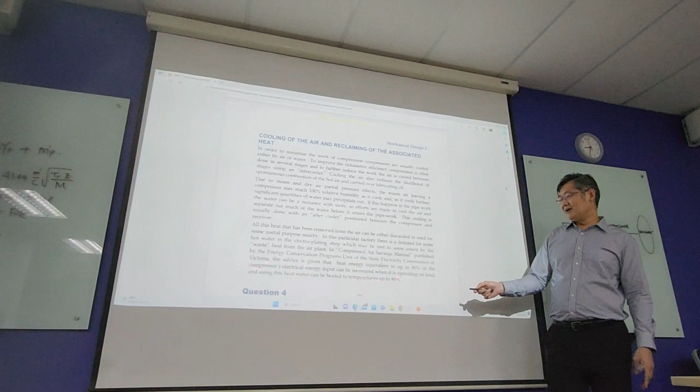According to the Australian standard, Victoria State, you are able to salvage 80% of the power - that energy you supply to the compressor. You are able to use 80% of it to heat up water to 80 degrees Celsius. This is what the state of Victoria allows the factory to do.

So now come to our question here, question 4. Partner 1 and 2 do it jointly, worth 2 marks. From the sample table of aftercooler provided, which I think we have seen - so which one did we select last week?

The aftercooler, remember? HD16. HD16, right? Okay, very good. HD.

Given here, for this aftercooler, if water enters at 15 degrees Celsius, at what temperature will the air leave it? Alright, this is part A.

Part B: assuming the large electric motor driving the compressor is 93% efficient, determine approximately what percentage of the electroplating hot water demand can be met by heat scavenging. Alright, so what does that mean?

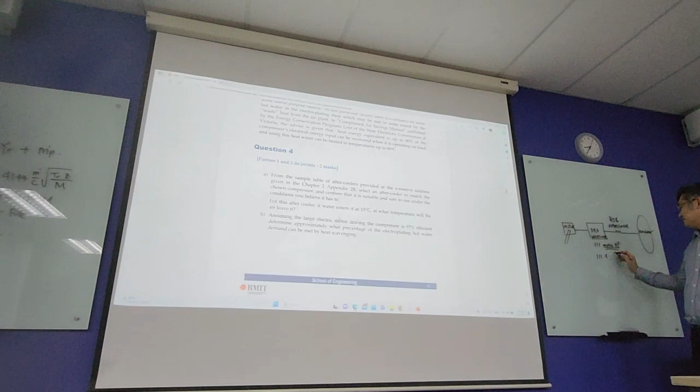Because later on we want to find out the electrical power supplied to this compressor, we want to find it in kilowatts. How do you convert horsepower to kilowatt? Metric, and we call this metric horsepower. So 111 times 1 over 1.36.

This one you Google, you know - horsepower to kilowatt, use Google conversion, you get it. So what's the value? Horsepower converted to kilowatt, from the table, from your DR4 table, DR4 your compressor.

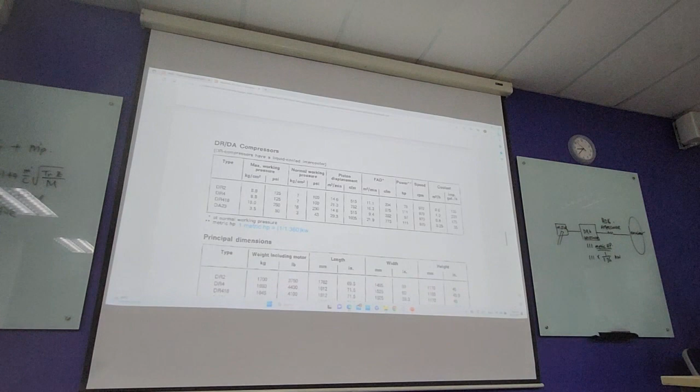Yes, when I Google, I got 1.34. Is it power divided by 1.34? What value did you get, do you have this? I don't know, we Google, you got 1.36, mine is 1.34.

Oh okay, so one is British horsepower, one is metric horsepower. In Australia they use metric. So this is metric, another is British unit. So different value, but close. Different, but still different value. The unit they use, so we stick to metric.

Okay, so in this case, this one is 81.6 kilowatt, right.

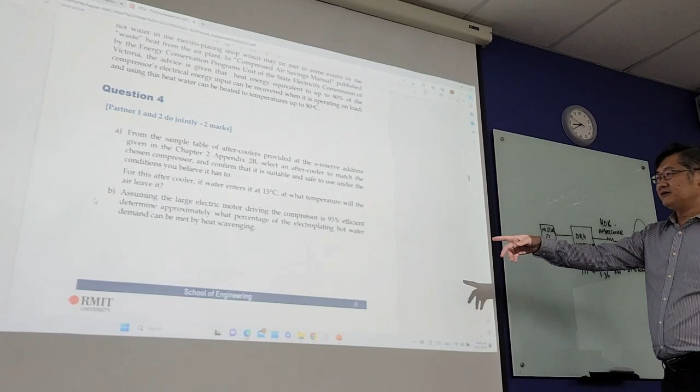So what happened is our question asks, right? Okay so here assume, electric motor driving compressor is 93% efficient. That means this is 93% efficient, right? So for the electrical power supply to the motor, and the motor has this efficiency of 93%, what will be the original power supply to this compressor? Greater or lower? Greater, right. Okay so what will be the value for this kilowatt used?

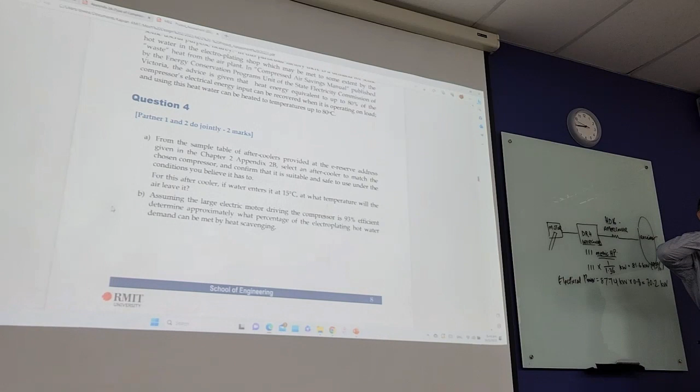Alright, so for your part, according to the table, after you calculate, how many times does the compressor go on and off? When compressor is on, means what? Means you are able to generate heat. Compressor off, there may be no heat generated. So you have to find out the cycle, and then multiply to get what will be the heat generated by the compressor. Then you know the exact figure of what the heat generated will be, depending on how long your compressor is actually on.

So later on when you go back, you calculate out the compressor on time. Then you will have this roughly this figure, plus minus, very close, supposed to be, because according to your list, your compressor is always on, probably a few cycles off. Most of the time it will be on, so quite close to this, quite close. Alright.

So next thing will be how much heat can we draw from the intercooler and aftercooler?

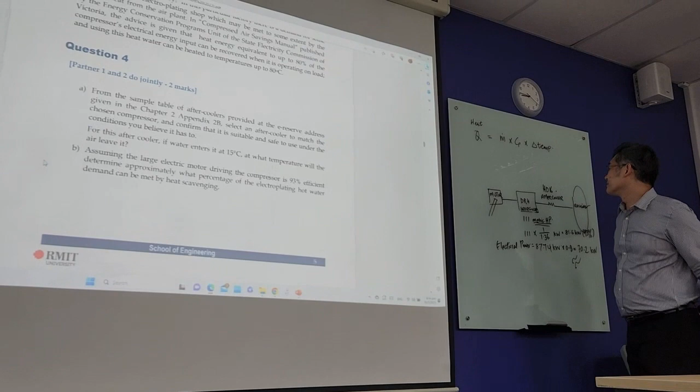Okay, so we talk about mass flow rate, right? This mass flow rate, where can you get the mass flow rate? Where can we get this mass flow rate? Cp specific heat, this one is specific heat, and then this is the temperature range or temperature change.

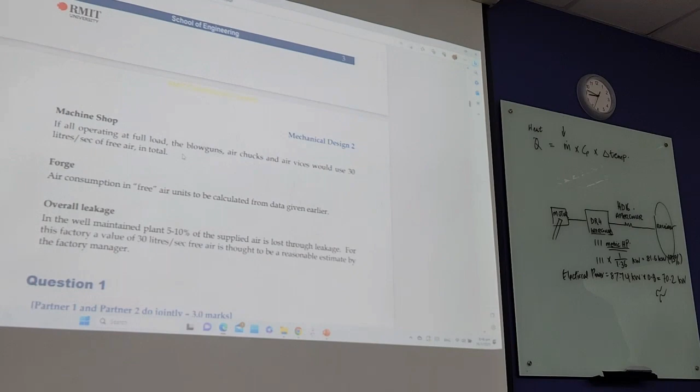Alright, so from our, remember initially our workshop, electroplating workshop, they mentioned about the temperature, right? If I'm not mistaken. Okay, over here, right, electroplating workshop.

Alright, so what would be 15 to 60? What would be the temperature change? 45, right? Right, 45. So in this case, what it means is a change of 45 degrees Celsius. How much heat do we need to heat up from 15 degrees Celsius to 60 degrees Celsius? How much heat needed?

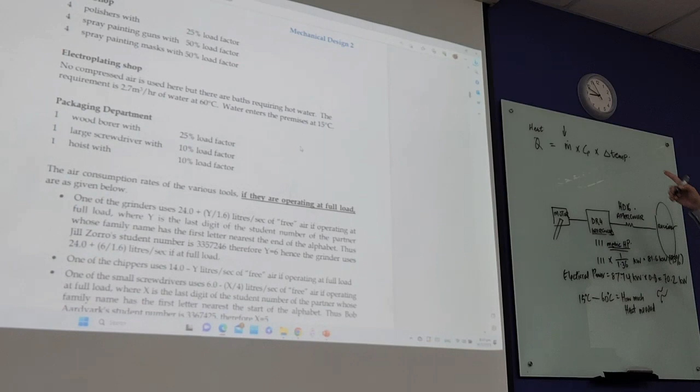So we apply this formula, heat needed, so this one with 45, right, specific heat. If you Google, you know water's specific heat, right?

Okay, now we come to this mass flow, right, where to get the mass flow, right? But this one is for the volume flow rate. Okay, it's density, oh yeah, density. They convert it as heat transfer, I forget already. Density.

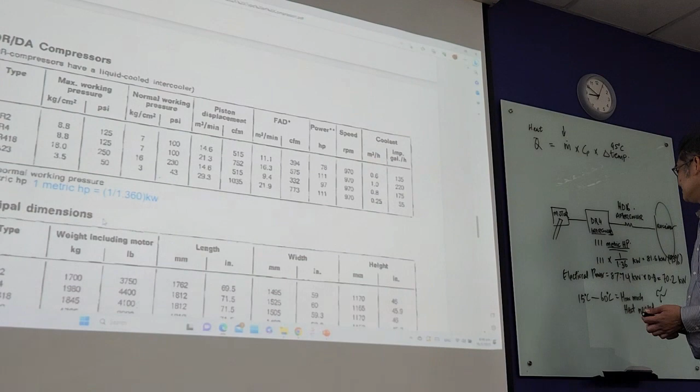Okay, now we take a look at this, our compressor DR4, cooler. Alright, so this is the volume flow rate, right? Correct? Alright, so for the compressor we have 1 meter cube per hour.

Okay, how about after cooler? Remember after cooler? HD16, alright, DR4. Okay, so over here you can see after cooler we use for DR4, water consumption 1.7, very good, so after cooler is 1.7. End up will be 2.7, right, 2.7 per hour.

So this is mass flow, right? This is the volume flow, so to convert the volume flow for water, right?

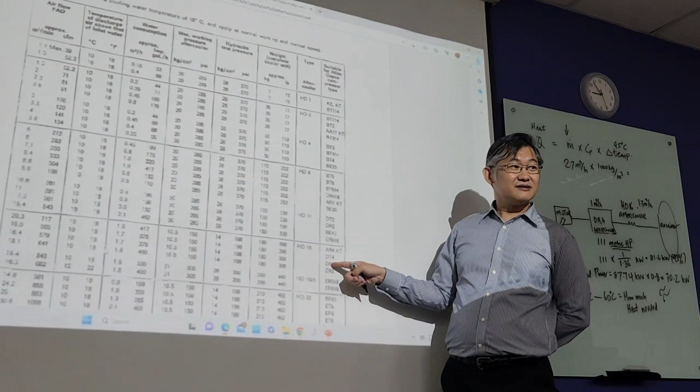Alright, so volume density of water, you know, right? Density of water 1000 kilograms per meter cube. Alright, so we want to calculate kilogram per second, right? So from hour we want to get second, right?

Okay, so what will be the mass flow, 0.75, right? Kilo per second, right?

So what is the heat needed? So now we can calculate the total heat needed to warm up the water to 60 degrees Celsius, right? So you just plug in because this is mass flow rate. Your specific heat of water, you know, alright? Times your 45.

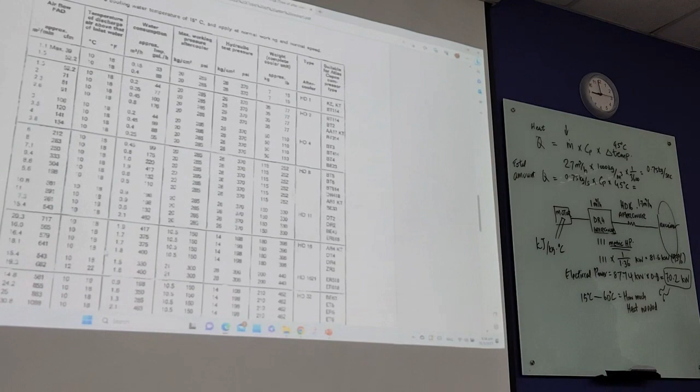So the report, okay, now we come to how you write the report, right? So imagine you are the engineer, engaged by the client, engaged by the customer. So how you write the report in order to impress, or not so to impress, but to show the customer or the client that you actually do your homework. You actually do the calculation to prove why you have to install this and that, right?

So you have to write in the way, like a report form. So question 1, new page, question 2, new page. So that as a client, I can see and read easily. Because previous school, what they do is they cut and paste the Australian standard. Then everything Australian standard. As a client, I do not need to refer to Australian standard, right?

You just need to quote, okay, in accordance with this clause, alright, this Australian standard, after that the report calculation. Don't go and copy all the statement. Alright, mean nothing to the client, mean nothing to customer. I waste my time reading all this.

But I want to know the source, where how you quote it, right? You have to quote the source. Alright, clause don't know what, according to Australian standard. Then after that, all this requirement needed from the question.

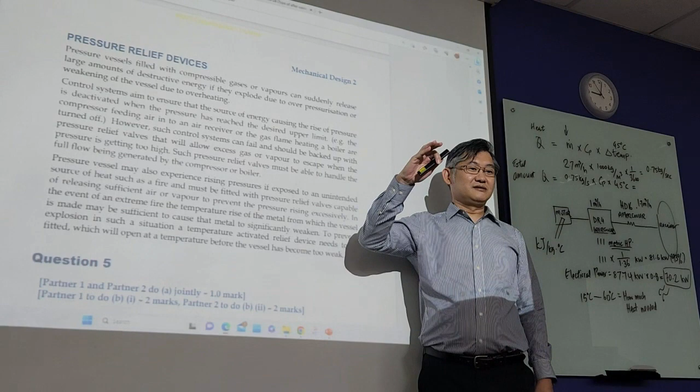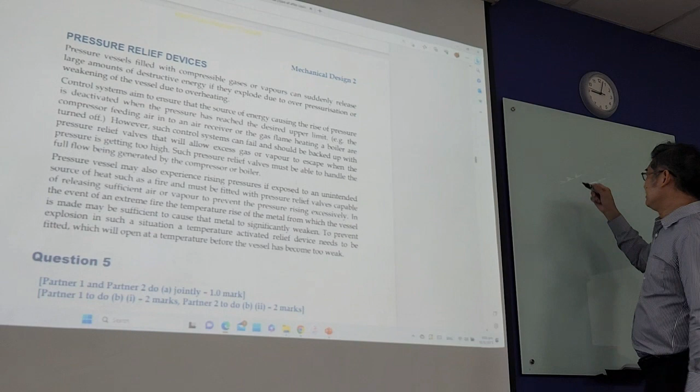So remember what is the value we discussed just now? Our compressor must stop at 790 kPa, right? Remember, compressor off at 790 kPa.

Your maximum working pressure for the DR4, where's the 862? Very good, 862.5 kilopascal. So we will take, for simplicity, this maximum working pressure as our set pressure, also equal to set pressure.

So what does that mean is, if let's say our compressor failed to stop, it will keep pumping air. In this case, the receiver becomes pressurized further. So our safety device at 862.5 kilopascal has to release air, or the valve has to be opened.

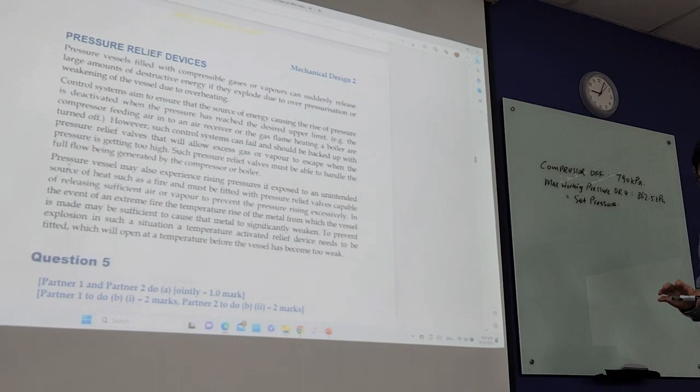Alright, so we have discussed this just now. However, such control system can fail and should be backed up with a pressure relief valve that allows excess gas to escape when pressure is high. Such pressure relief valve must be able to handle the full flow generated by compressor. The vessel may also experience rising pressure if exposed to an unintended source of heat.

Alright, so this is scenario 2 we discussed just now. Sources such as fire must be fitted with a pressure relief valve capable of releasing sufficient air or vapor to prevent pressure rising excessively. In the event of extreme fire, temperature rise of the metal from which the vessel is made may be sufficient to significantly weaken the metal. To prevent explosion in such a situation, a temperature activated relief device needs to be fitted.

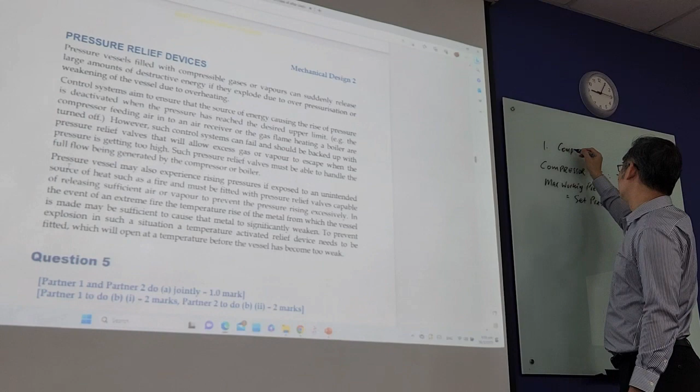Alright, so this is the first scenario: compressor fail. Second scenario: near fire. So what will be the 110% of 862? Our safety valve, what's the value?

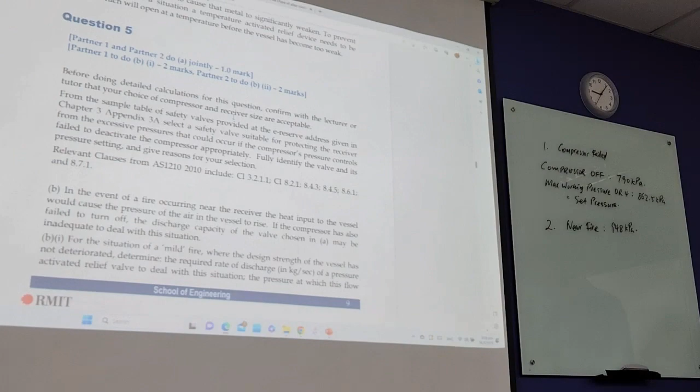Alright, okay, now we come to question 5. Just an overview, they actually give you some overview of what to do. Before doing detail, okay, partner 1 and partner 2 do part A together, jointly. I think they put the A missing, so this is part A.

Part A bracket missing. Alright, so before doing detailed calculation for this question, confirm with the lecturer or tutor that your choice of compressor and receiver size are acceptable. That's why I want to repeat this: if your compressor and receiver size deviates too much, I can't help you because it'll all be haywire. That means you calculated wrongly, right? From the sample table of a safety valve.

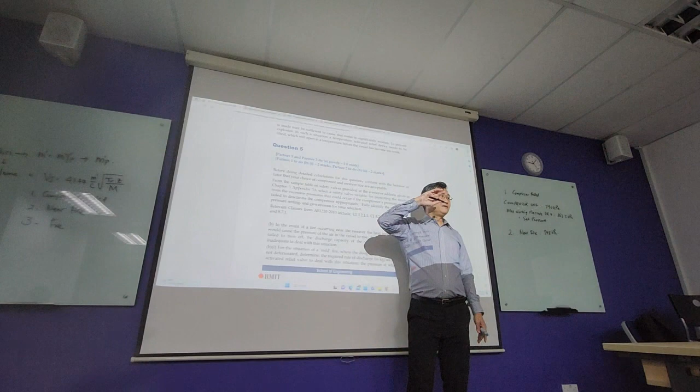Provided at the e-reserve address given. So if you have time, go check. Can you access the activity again? Cannot? Last week I believe most of it couldn't, but this week can. Canvas activity, still cannot? Then I will post it up. If let's say it cannot, then I will post appendix 3A today.

Suitable for protecting the receiver from excessive pressure that could occur if the compressor pressure control fails to deactivate the compressor appropriately. To identify the valve and its pressure setting, give reasons for your selection.

Alright, so please refer to Australian standard. Can you see the Australian standard as well? Has anyone already downloaded Australian Standard 1210? No, nobody downloaded it. Then I will post it again tonight.

So this is A, alright, this is A. Partner 1 and partner 2 do this jointly, right? Partner 1 to do B section 1, partner 2 do B section 2. So you will see, that is 2.

Over here, in the event of fire occurring near the receiver, the heat input to the vessel causes the pressure of air to rise. If the compressor has failed to turn off, the discharge capacity of the valve chosen in A may be inadequate to deal with this situation. Why? Because of fire nearby. Alright, our set pressure is 862, but now, near the fire, it will rise up to 948.

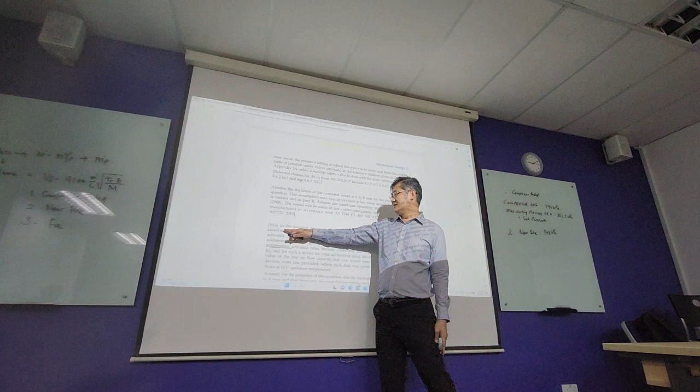So this one is meant for scenario B, so partner 2 has to do this. Subsection 2: in the situation where fire has caused the temperature of the vessel to rise sufficiently to cause the strength of the metal to be weakened - just now I showed the chart, right? You have to plot the chart and then find out the relieving temperature, TR, from the chart to do this question.

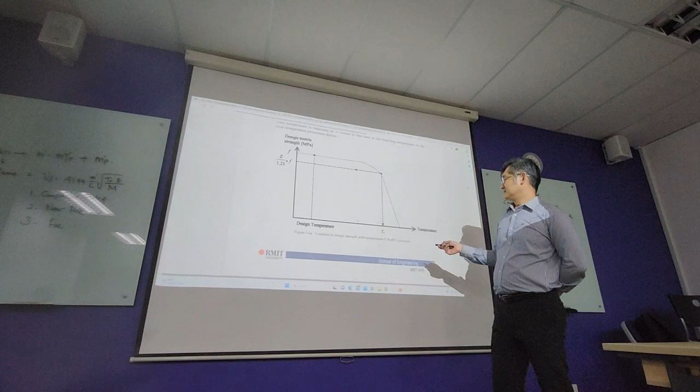Okay, so I go back in order for you to see. Question 6, the last question - what is the last one? Question 6, last one. I got it, this is the chart for those partners who need to do this question. This is how you use this to retrieve or get your relieving temperature.

We finished like one week early, then got the next assignment. But we got one week break. Tuesday. Oh, yeah.

Next week, alright, so this is how you get your relieving temperature. In order to use this formula, because this formula requires you to use this TR value. For partner 2, I hope you take note of this, so when you go back, you are able to proceed with your questions.

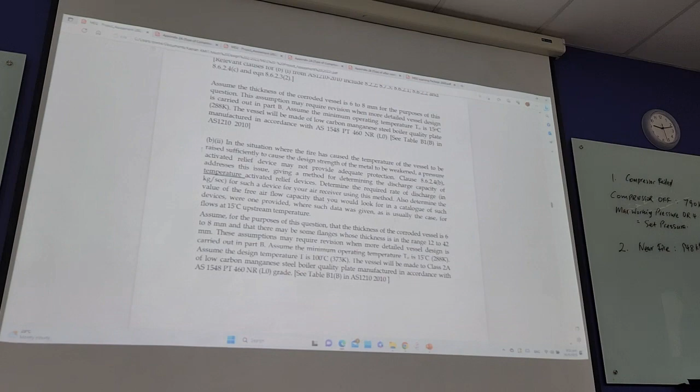Okay, so I have some exercises for you to familiarize yourself with these questions, let me find it. Better not as homework, I don't know.

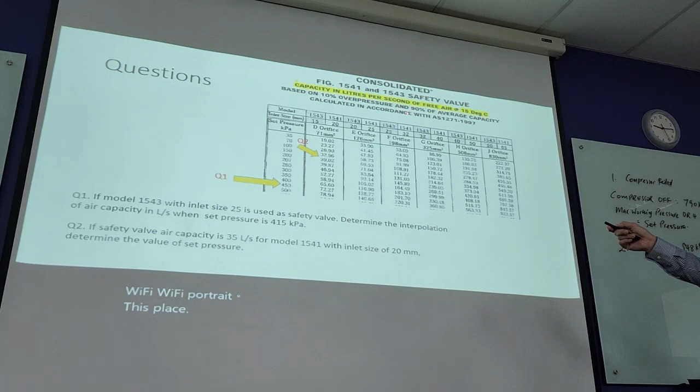Okay, so when you go back, this is the safety device, right, that you will use. You can see over here, 1541, 1543 safety valve - so 1543, 1541 model. Based on 10% overpressure and 90% of average capacity, calculated in accordance with Australian standard. Capacity in liter per second.

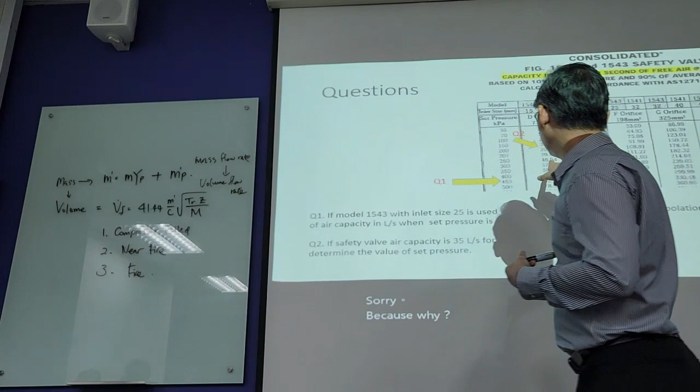If you ask why, later on we have to change to liter per second, because this value here is in liter per second. Because we talk about mass - remember just now we talked about all these, in mass flow rate, mass flow rate - we want to convert to volume flow rate. Because of the safety device, we use liter per second, which is a volume flow rate. So we have to apply this formula.

Okay, so over here you can see, if you read your question right, they talk about the orifice, the orifice surface area - this must be more than 10 mm. So this is a surface area, you have to find the diameter, right? The specified diameter is more than 10 mm. So you have to find the proper orifice to use, depending on your set pressure. Remember what is our set pressure?

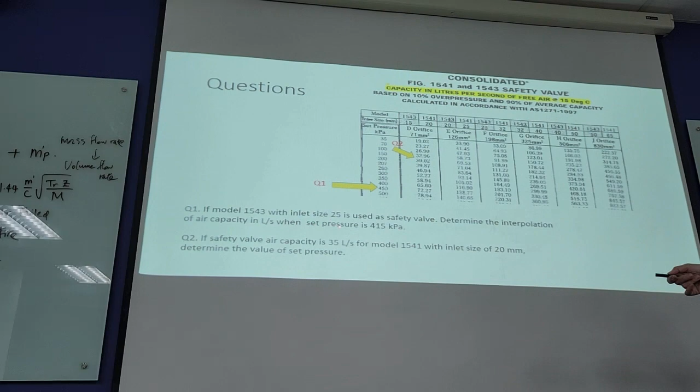Alright, but this exercise is just to familiarize. Okay, we do question 1 and question 2. In model 1543 with inlet size 25 - this one 1543, yeah, this one is used as a safety valve. Determine by interpolation the air capacity in liter per second when set pressure is 415, so in between here, right, because later on you have to do interpolation, because nobody will get the exact value, you might have values in between.

So how do you do interpolation? Okay, so now this is 1543, right, so we are referring to this part. So we spend 5 minutes to do this, at least you get the idea of how to get interpolation for this safety device in liters per second.

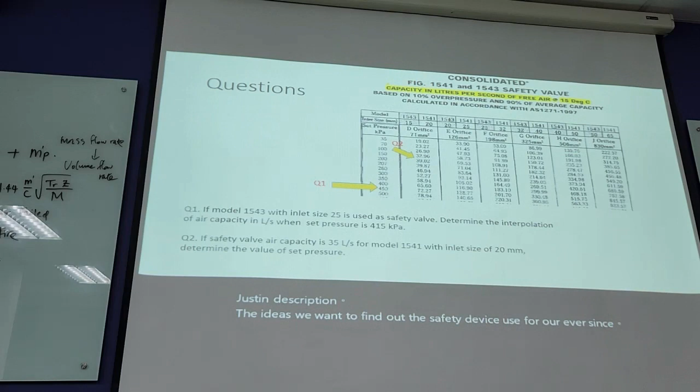Anyone have difficulty digesting this question? The idea is we want to find out the safety device used for our air vessel. Our set pressure is already determined because from our compressor, 110% of set pressure is this value, right? But in order to go back and use this to find the safety device, we do this exercise. When you go back, apply the same approach, then you will get the correct value for your answer. So now let's try to exercise a bit. You know what to do when you go back.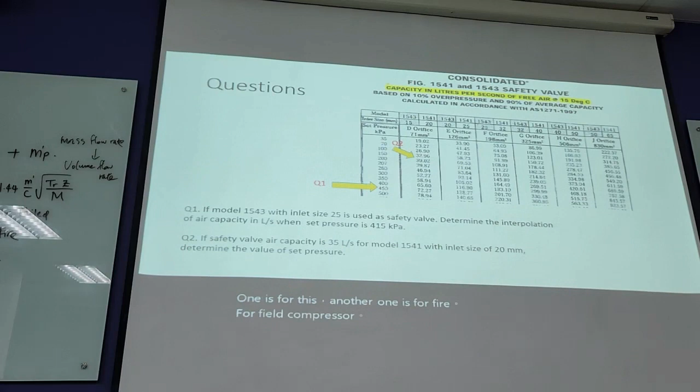So the safety valve will be at the receiver, is it? Yes. So the one that we are reading there is what's coming to the receiver, basically. Yes, receiver, correct. We're talking about receiver, compressor, right? Imagine now your compressor fails and keeps pumping air. So you must have a safety device here. One is for this, another one is for fire. This is for fuel compressor. So it depends on your design. Another one is for near fire. And then the partner two will have fire.

But to find out this, you have to know how to use this table. Alright, so let us spend some time, then go back, you can sleep better. This is about 120.

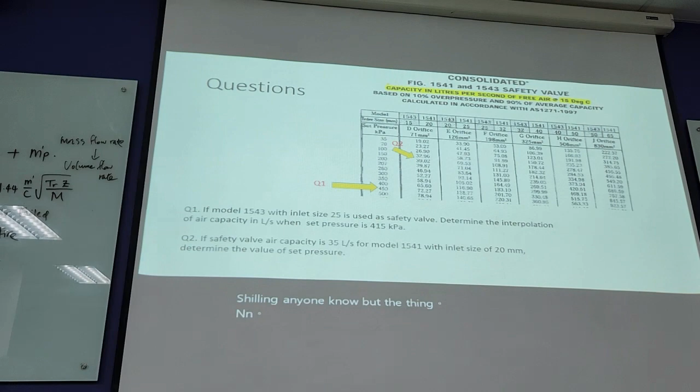Mr. Ashraf is not here, no? Because I don't see him logged in. Mr. Pradeswaran also not here. Mr. Takashini, anyone know Takashini? Edmund Ng. Okay, I know you, this one, right? Muhammad, so it's one Amiru, copy, but Amiru do it. But he says it's size 25, so it's this one. No, this one is. Anyone know the name I mentioned just now, your classmate, your friend? Can you inform them or update me where are they about?

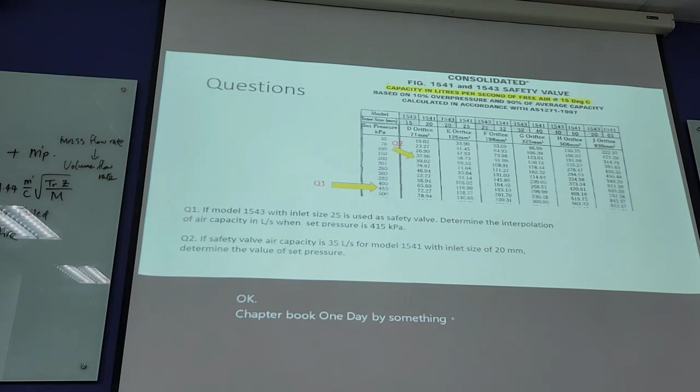You take the set value. So for those who have an issue for this case, we want to find the pressure, so why is it interpolation, why is it not the pressure but the air capacity? So y1 is the first value, air capacity, which is 183.1. Then x is the pressure, so x is your set pressure, that means 415. Alright, so this is how you carry out one point of interpolation. Similarly, for your question, also do the same.

What's so different?

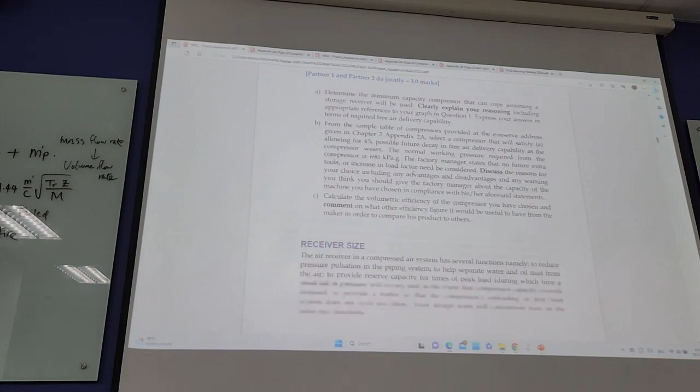So fast, Monday, again, no Monday class. Fast right? What the heck. We just study after that, just like few days only. What the heck, that's 78, oh that's a big impact.

Okay, the 10 mm is actually specified in the Australian Standard 1210. If you look carefully, it actually mentioned it must be more than 10 mm, to prevent sticking, because if the area is too small it might be subject to contamination or corrosion.

Let me check whether subsequently... oh, they haven't checked yet. I forgot, suddenly my brain cannot work. Oh, maybe it's this one.

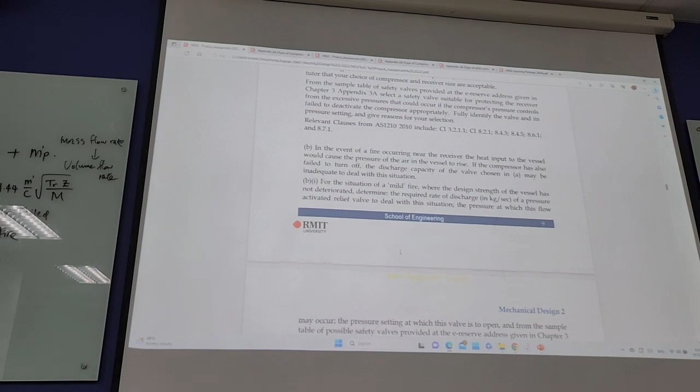Go back and see the video and try again. The paragraph didn't mention 10 mm, but if you go to Australian Standard 1210, they actually specify more than 10 mm. Good question, 10 mm, it's actually derived from the Australian Standard - the diameter.

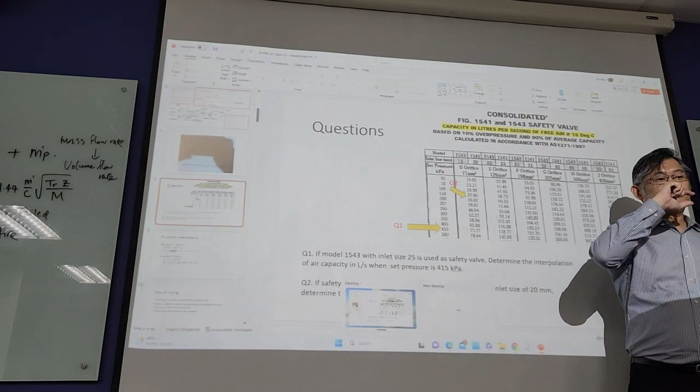Okay, so now the thing is, if you cannot find - let's say after you select the safety device and the diameter is smaller than 10 mm, what can you do? You have to change to another safety device to meet the requirement, because Australian Standards say more than 10 mm, we have to conform. Then you have to suggest an alternate safety device able to discharge the overpressure while also meeting the bore diameter. Alright, so this is what we do.

Any issue with question 2 or not? Question 2 is the other way around - you find the set pressure. Given the flow rate, you are able to find the set pressure. Vice versa.

Okay, any question related to interpolation and finding out safety devices? Alright, if no question, let us go through. As you know, today we are supposed to cover all of Project A, Project A questions for week 2.

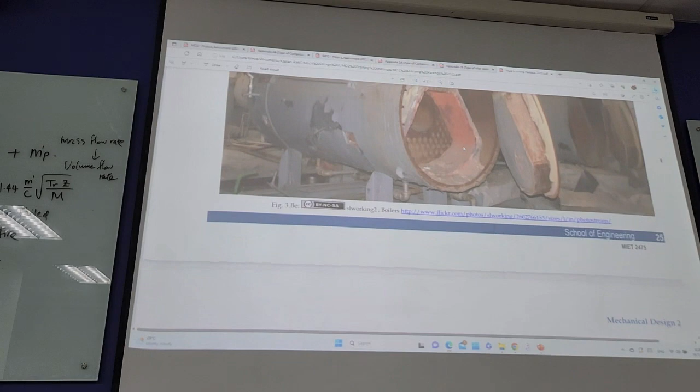And the last one will be piping. See the position from here - that's not the one. If you have time, go through all these slides yourself.

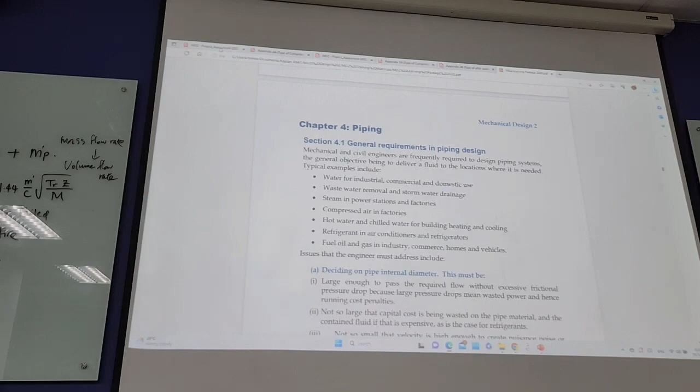Alright, so piping - for us we also have to design piping according to our requirements here. Let us take a look at the requirement. You can see from here, distribution of air to tools - after our receiver, this output goes to the various workshops. Altogether we have 6 workshops.

If you look carefully, how many workshops do we have? We have fettling shop, machine shop, assembly shop, paint shop, electroplating shop, and packaging department - 6 workshops, right, 6 workshops.

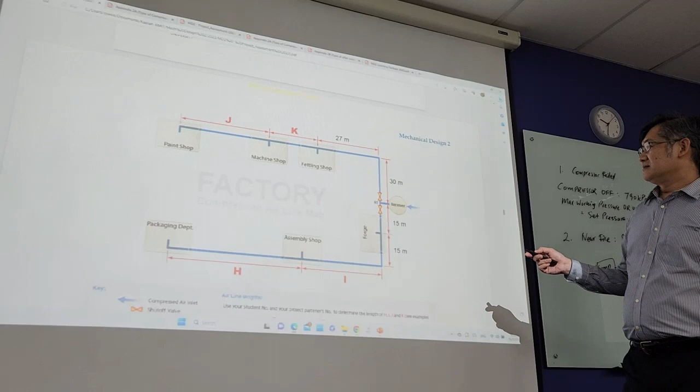Over here they show us the requirement - this is just for overview. When you design, you have to install fittings, and then also at 30 meters there's a drain line to drain the water out. This is just a guideline showing us how you run your piping. Alright, so this is our air receiver.

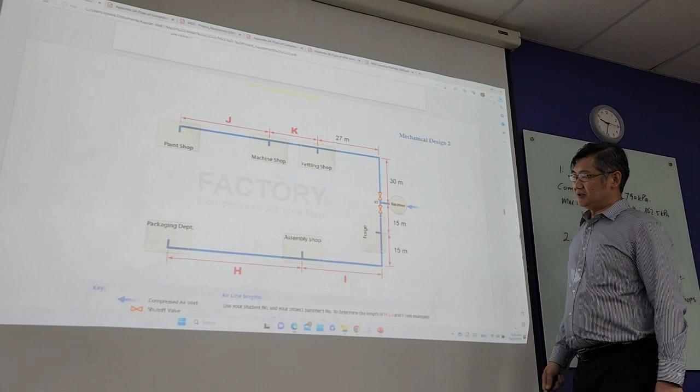Shutoff valve, then on my right we have fettling shop, machine shop, paint shop; on my left I have forge, assembly shop, and packaging department. Following the distance drafted here, you have to calculate pressure drop towards the end. Also, you have to meet the required velocity, which must be more than 6 meters per second.

Alright, later we'll take a look at the question, but this gives you some idea - you need to actually draft this on the report. And this is JKIH, so depending on the partner, later you will see the question asked depending on your student number.

So over here they show some of the distances. Alright, using your student number and your project partner number to determine the length of HIJK. So given this, depending on your student number, everyone will be different.

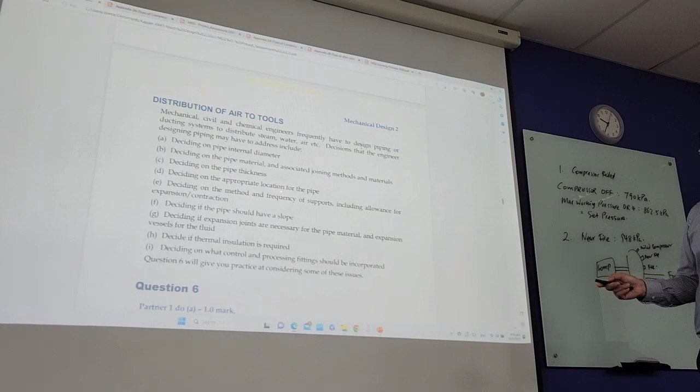Okay, so let us take a look at the requirement here. The decisions an engineer designing piping may have to address: the internal diameter of pipe, deciding pipe material, associated joining methods and materials, deciding thickness, deciding location, deciding method and frequency of support, allowance for expansion, deciding if the pipe should have a slope for drainage of water, deciding if expansion joints are necessary for the pipe material, and deciding if thermal insulation is required.

This is especially important in Australia, where they have winter and ice forms - just like for us, we have a student from Moscow, and he shared what the temperature is like in Moscow during winter.

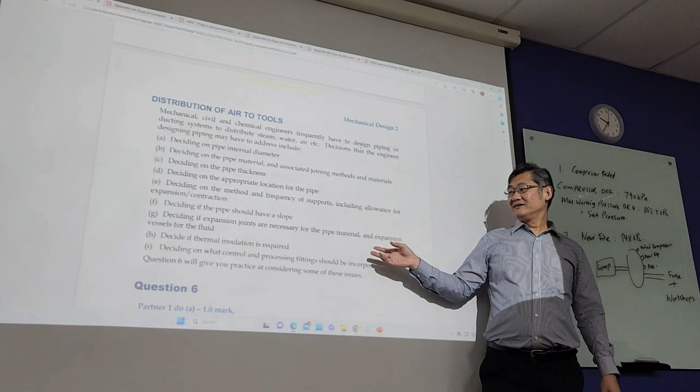Minus 41 degrees Celsius. I don't know how he survived, minus 41. So what happens is, even aircraft on the ground, you have the on-heater, because at minus 41 it becomes ice. As you know, if the pipe or vessel becomes ice, what happens? It ruptures, expands and ruptures.

So even aircraft on ground, they turn on the heater just to prevent ice from forming at minus 41. In Singapore we don't have these issues, but in Australia and Russia they have to properly insulate the piping. For aircraft it's the same thing, all the piping is insulated with this heating element.

In the air, what is the temperature roughly, at cruising speed? At 36,000 feet, let's say you go on holiday, up in the air at 36,000 feet, it's minus 56 degrees Celsius. So without heating, everything becomes ice.

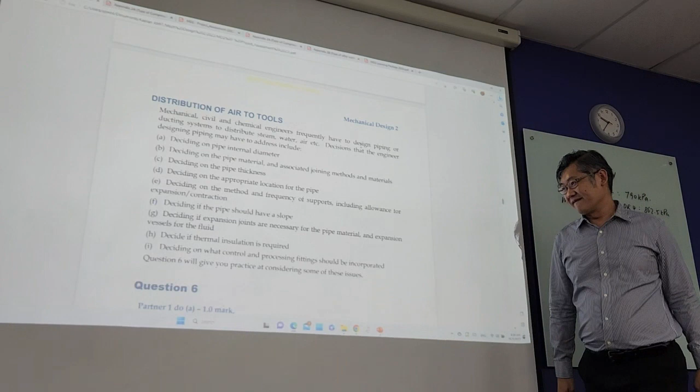Alright, so decide if thermal insulation is required, and decide what control and processing fittings should be incorporated. Our course notes have explained the fittings, so please take a look and decide what fittings you need to install.

So over here you can see the distribution. Partner 1 does A, 1 mark, Partner 2 does B, 1 mark. X and Y are defined, okay. If X plus Y is an odd number, then partner 1 and partner 2 do part C together. If X plus Y is an even number, then you do part D together. This is so that it prevents you from copying.

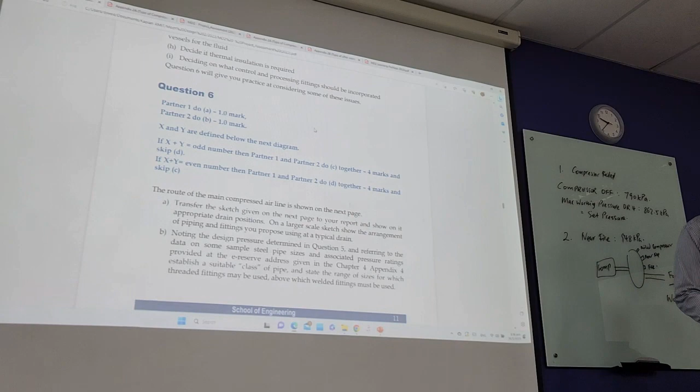Okay, so the route of the main compressed air line is shown on the next page, what we have just seen now.

Now we want to take a look at this requirement. The objective in questions C and D below is to determine appropriate internal diameters of various sections of the main pipe. So what happens is this, you must understand.

The pipe size is different. Here, higher velocity, right, slowly going toward the end, smaller the pipe, because the demand is reduced. Over here, the demand is more because you must cater at this section, from the receiver, you must cater for the downstream, the total demand. So the pipe has to be bigger.

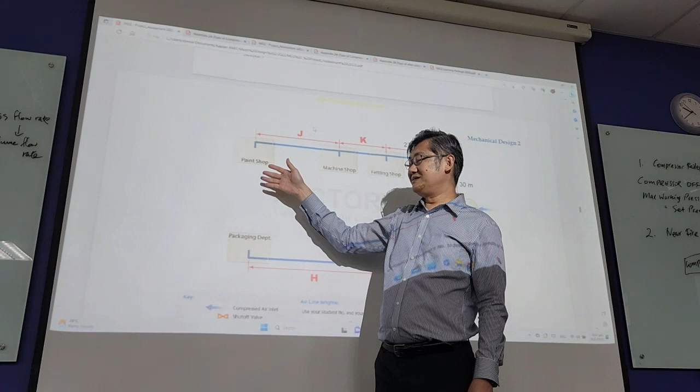Coming to this fettling shop, then you reduce the pipe size for the machine shop, and then smaller size for the paint shop, because the demand gradually reduces towards the end. So over here you must make sure it accommodates the forge, assembly shop, packaging department. It's not the same size throughout, it cannot work. It must be bigger at the starting point, toward the end a smaller pipe size. So this is the requirement.

Then over here, leakage in each workshop is estimated at 5 liters per second. You need to include this, because altogether we have 6 workshops. Each workshop's estimated leakage is 5, so total will be 30. So for each workshop please include 5 liters leakage.

2 commonly accepted guides for compressed air piping. The velocity in the main pipe should not exceed 6 meters per second to avoid entrainment of water. So you must find out the pipe diameter that does not allow velocity more than 6 meters per second.

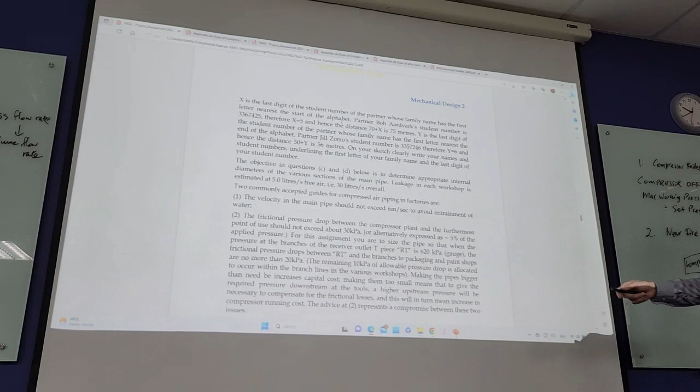After that, the frictional pressure drop between the compressor plant and the furthermost point of use should not exceed about 30 kilopascal, meaning towards the end workshop. Alternatively expressed as 5% of the applied pressure. So this is what happens, it's 30 kilopascal. Remember our minimum 620 minus 30, that's 590, you still have remaining 590.

For this assignment, you are to size the pipe so that when pressure at the branches of the receiver outlet T-piece RT is 620 kilopascal, remember the table we discussed now comes into picture. That's why we must make sure the receiver has minimum 620, because to the workshop and forge we need 590.

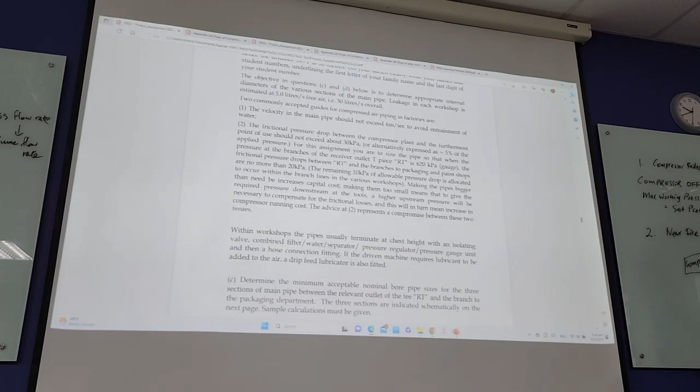So the frictional pressure drop between RT and the branches to packaging and paint shop should be no more than 20 kilopascal. So adding up will be 30. Making the pipes bigger than need be increases capital cost. Of course you must make sense of this - if you want to use a bigger one, is it better?

But in the real case, actual fact is, as an engineer, your customer will complain, why do I have to pay so much? Making them too small means to give the required pressure downstream at the tools, a higher upstream pressure will be necessary to compensate for frictional loss. So you have to find the right size.

Within the workshop, the pipe usually terminates at chest height with isolating valve, combined filter, water separator, pressure regulator, gauge unit, and then hose connection fitting. If the driven machine requires lubricant to be added to the air, a drip feed lubricator is also fitted. So you have to include the fittings in your drawing.

So after that, part C, determine the minimum acceptable nominal bore pipe sizes for 3 sections of the main pipe between the relevant outlet of the T receiver and the branch to the packaging department. The 3 sections are indicated schematically on the next page, right, so over here.

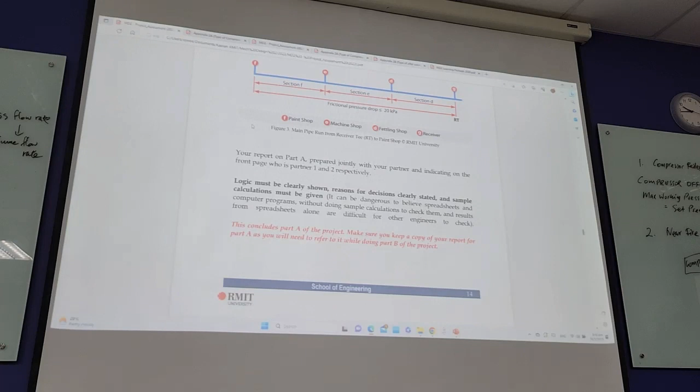Let's just do Part A. Submission, validation, validating calculation means the calculation is submitted, submission validating calculation, and layout drawing submission. So now we do some exercise for piping, to give you some idea how to go about doing this.

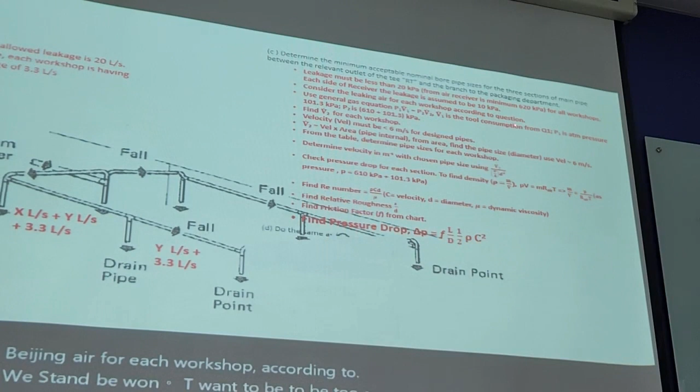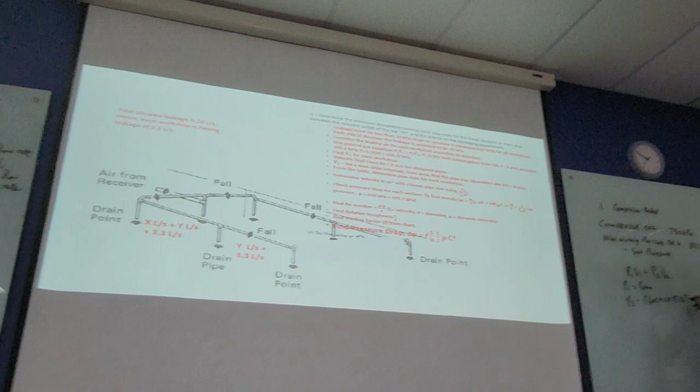Alright, so your P1 is atmospheric pressure, P2 is your 605. So this is a volume flow rate. How do you determine volume flow rate? Over here they show us velocity times area.

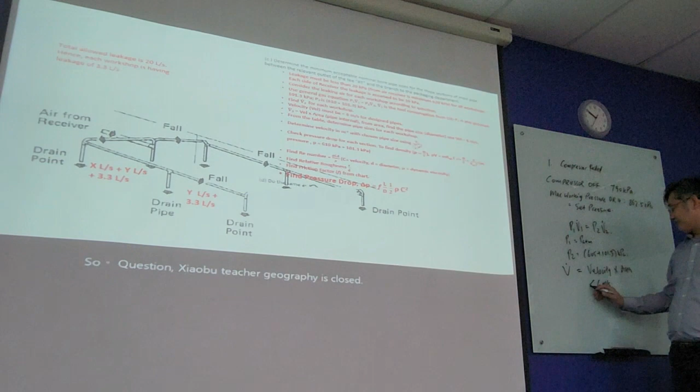So what is your velocity requirement? Cannot be more than, that means less than 6, 6 or equal. If you find equal, that means the maximum size, or I should say the minimum size needed. Alright, so using this, at least you know velocity, area, surface area of the pipe, then from there you can find the diameter.

Sir, is surface area the same as cross-sectional area? Ah, okay. Alright, after that check pressure drop for each section. In order to find density, we use mass over volume.

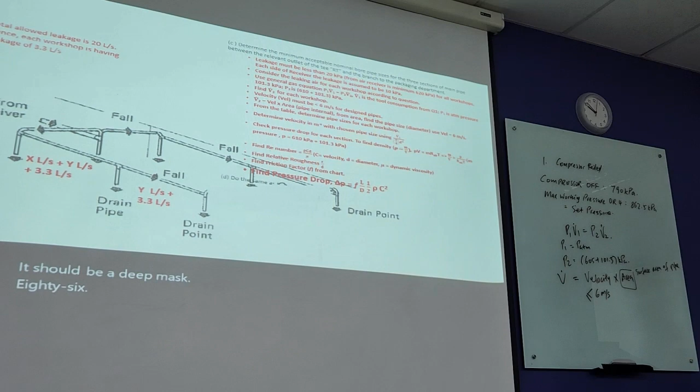So later on you have to find this pressure drop using this formula, or head loss, we call this. So diameter you can find out from the previous one, and this is from the Reynolds number. They call this the friction factor.

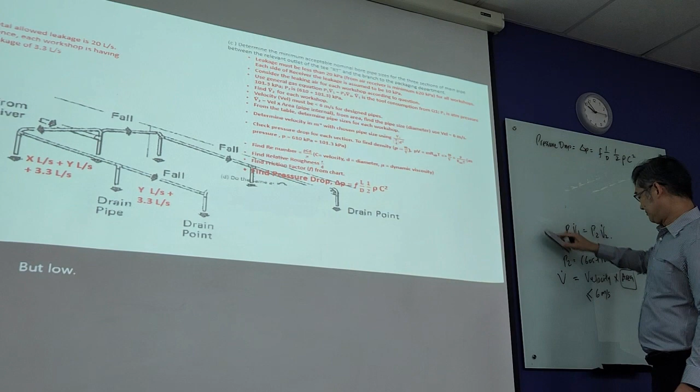Then to find this Reynolds number later: C is velocity, D will be diameter, your mu will be dynamic viscosity, density. So all these are relevant info for you to do these questions.

Alright, so for your case will be total leakage is 20 liter per second. Each workshop is having a leakage of 3.3 liter per second.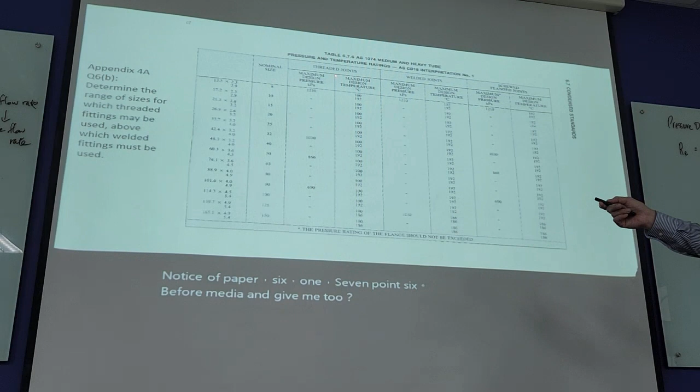Alright, once you figure out, the next one will be the table used for us to find the size of the pipe. Follow this table, 6.7.6, Australian Standard 1074, medium and heavy tube. So you'll find over here which type of pipe you use: threaded joint, welded joint, or screw flange joint. It depends on the application, you have to explain which one you use, depending on the velocity just now calculated, and the pressure drop as well. Then you will find the one most appropriate to the project.

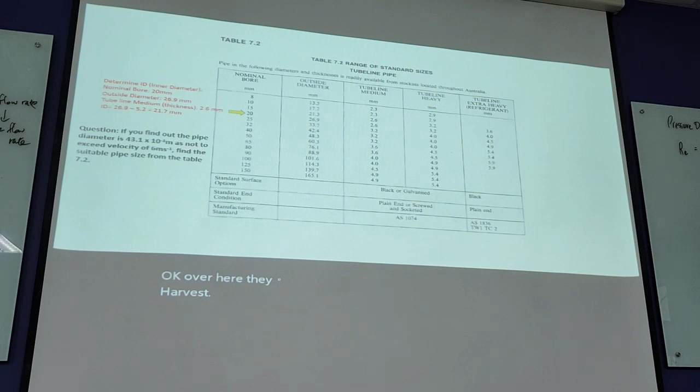So over here you can see nominal size, in mm I think, right? Okay, over here they actually show how do we determine this. Because later you have to find out this inner diameter.

Alright, so over here, let's say now this is 20, right, 20 is a nominal bore. Outside diameter 26.9. Alright, so the medium is what, 2.6. So what will be your inner diameter? 26.9 minus 2.6 minus 2.6. Alright, so actual one is 21.7.

So after the selection, you must actually use this selection that you selected, and then try to actually use this to test whether it's less than 6 meter per second. After you selected the correct size, you must make sure that the velocity is not more than 6 meter per second.

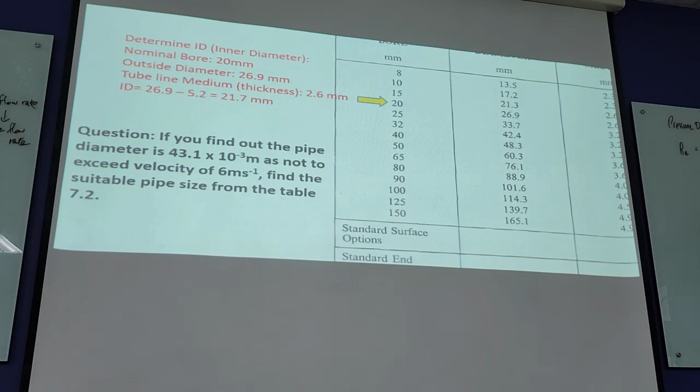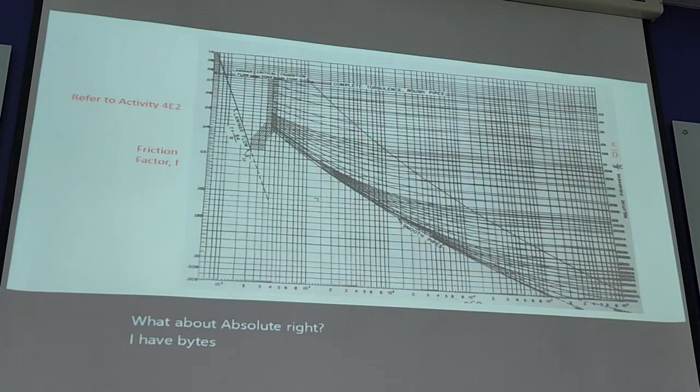And also over here, the material you use, you must also include this absolute roughness, epsilon 0.15. Use this value for your pipe internal surface so that you're able to use this to find the friction factor. So this is the one that we find out. Epsilon, we use diameter to find out this value. Then from this chart you are able to find the F factor.

So basically we want to find the rough value.

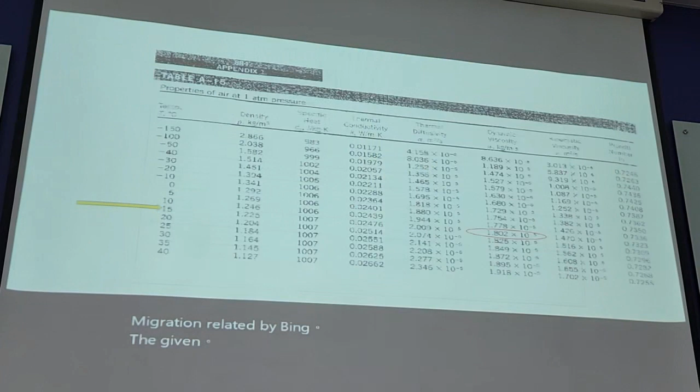Okay, next question related to question 6, piping. Where to get this information? This is from activity 1, the given activity. All the activities have all this info, but I will post it for those who cannot download.

But did you refer to Kaplan on why you cannot download from RMIT? Yeah, we don't even see it. So if you are going to repost it, will you repost it with the red subheadings? The red color thing, all the notes.

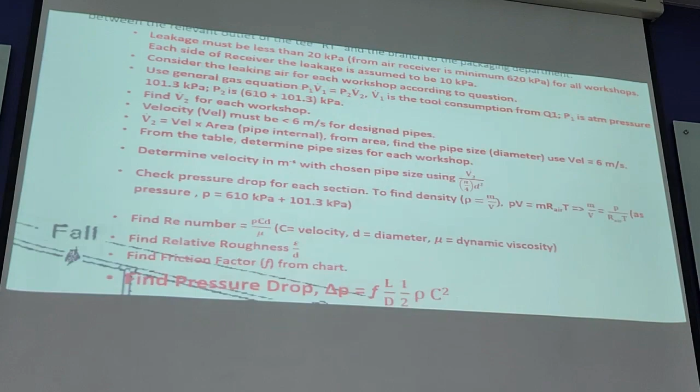No, that one no, this one can. Then could you go back to the slide I missed? Which one? The very first one where you had all the formulas for question 6A. This one, can you zoom in to the right? Zooming to the right, so we can all see, yeah right side, because it's a bit blurry. Different from my side. I'm sorry.

But this is just a guideline. You have to plug in your own value.

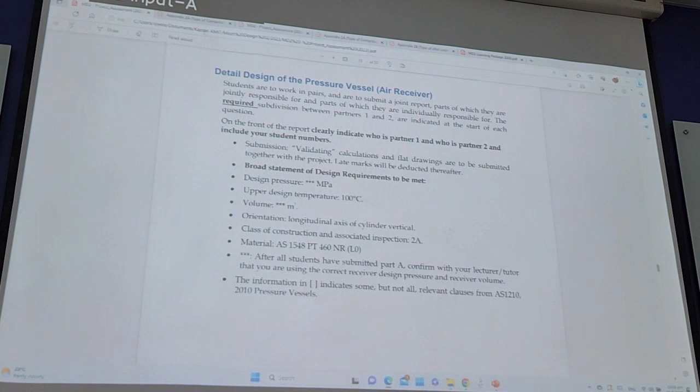Because it's... or different department, same scenario but different department. Although this topic, right, is not related to our project, because our project didn't require us to do the flywheel. Mainly what happened is most of the compressors have a flywheel, right? Flywheel is actually, you read through the course note, it tells us the story, right?

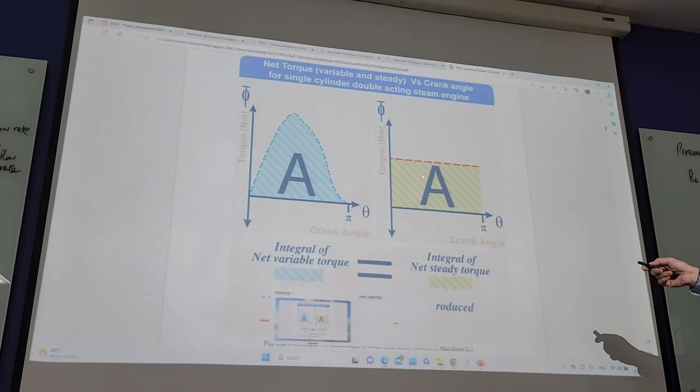In order to cater for the peak, you have a flywheel in order to smooth the process. So over here, I just want to highlight, same thing like what we learned for the load factor, right? You have to find the average, because this is the torque throughout the process, so you have to find out this average torque value. So you consider this as the integral of the net steady torque because of this chart. So you have to apply this formula. You need to know how to apply this formula.

Right, so basically similar to our load factor concept, because the torque value changes, you find the average. So this is what happened at the energy surplus and energy deficiency. Right, so what happened is later on you have to use this formula.

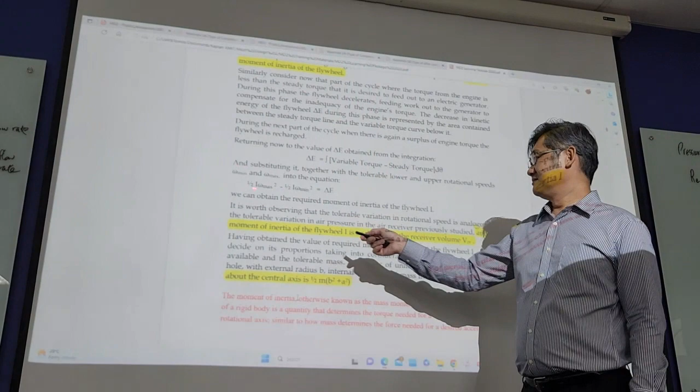So take note of this because it's a favorite question. You need to know how to use this formula. Inertia, especially at the inertia, we talk about inertia is this one.

They love to ask this question: inertia equal to? So this is your... because b squared plus a squared is this, the radius. Angular velocity is this one.

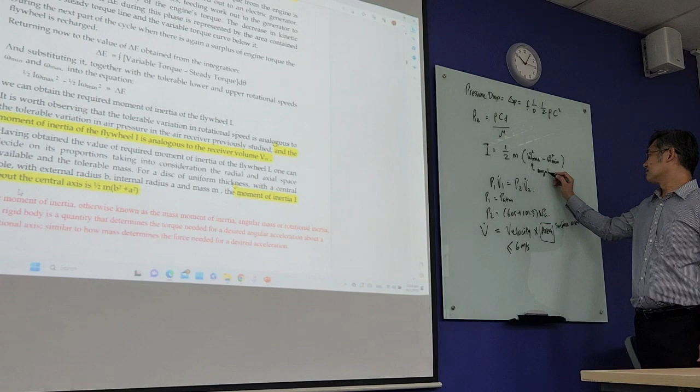Alright, so depending on the thickness of your flywheel, inertia changes, right, depending on the radius from the center. Right, so just now we talked about formula A and B, is the radius, in this case inner radius and outer radius.

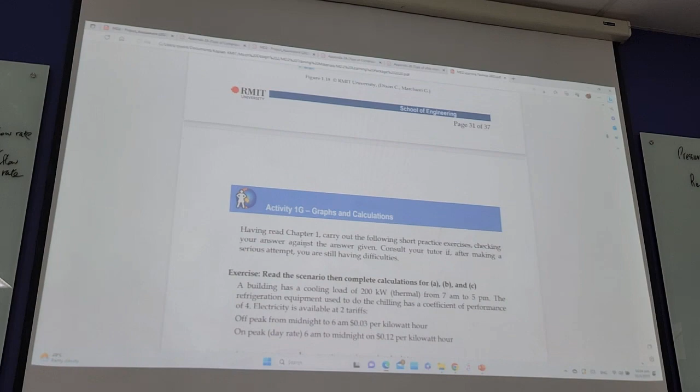Alright, any questions so far from the class? You have no question?